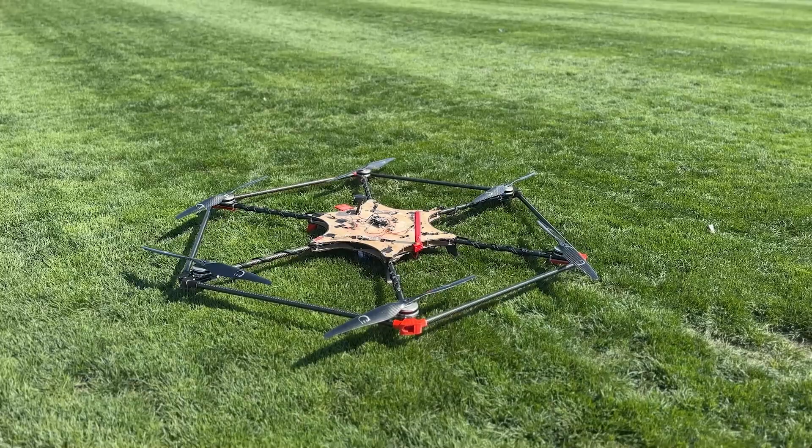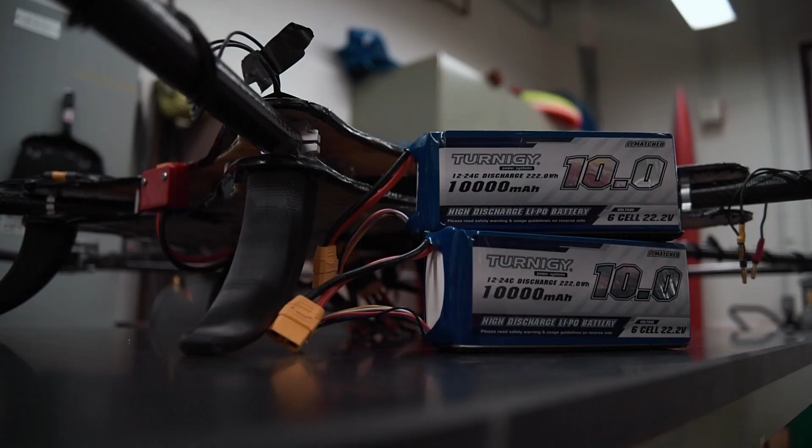This year, our drone, the Airbrutus 1, is a hexacopter 8 feet in diameter, made of 2 composite fuselage plates, carbon fiber tubes, and is supported by a carbon fiber truss system. Our propulsion system uses the Titan Air TA8010 motor coupled with a 30x10 carbon fiber propeller and is powered by 4 10,000 mAh batteries connected in parallel.

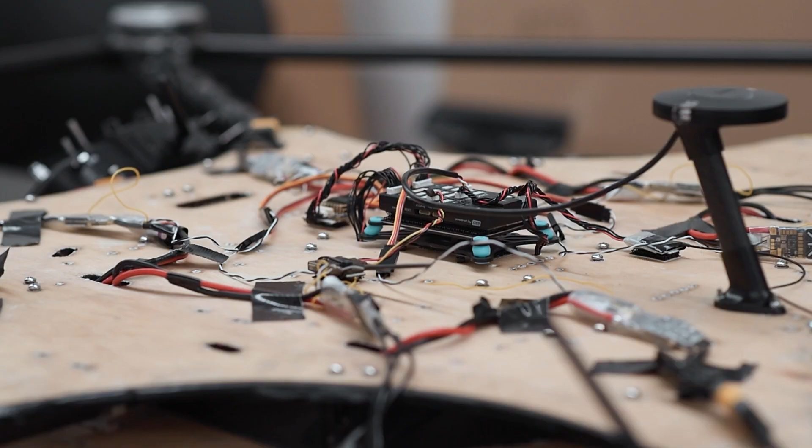The vehicle can hold up to 5 payloads on its bottom fuselage plate, and to drop them utilizes a spring-based parachute deployment system. For the season, the team chose the Pixhawk 4 for the flight controller, running the PX4 software. To receive video feed, Airbrutus 1 has a SIYI ZR10 camera connected to the NVIDIA Jetson Nano to process the live video feed.

The SUAS competition rules and Buckeye Vertical's mission plan lay out several vehicle requirements for Airbrutus 1. Airbrutus 1 must be able to fly for both 12 miles and 15 minutes fully loaded in a single flight, with the additional ability to fly 10 miles in 15 minutes. Airbrutus 1 must then be able to complete the payload mission in 10 minutes to leave a 5-minute safety buffer. To satisfy these requirements, the aircraft's gross weight must be less than 40 pounds.

Additional requirements include a 90% image detection accuracy, 150-foot object detection radius, and 25-foot maximum waypoint error. The airdrop zone is a 15-foot radius circle around the ODLC object. To ensure the airdrop lands within the circle, the team requires Airbrutus 1 to be able to position horizontally within 1 foot of the object. Additionally, the payload must land within 4 feet of the aircraft's position.

To comply with the competition's weight rules and optimize speed and flight time, the team created a 1.5-pound acceptance requirement for each payload. These criteria combine to satisfy the main requirement of aircraft stability. Lastly, the team requires a maximum 10 feet per second impact velocity for the payload, ensuring a gentle landing.

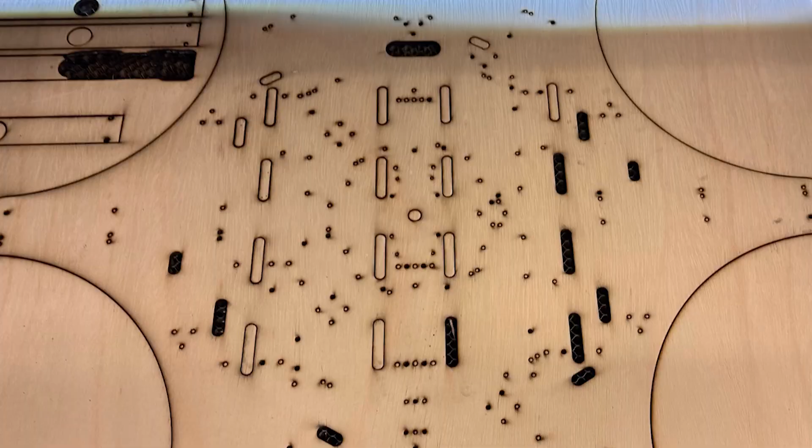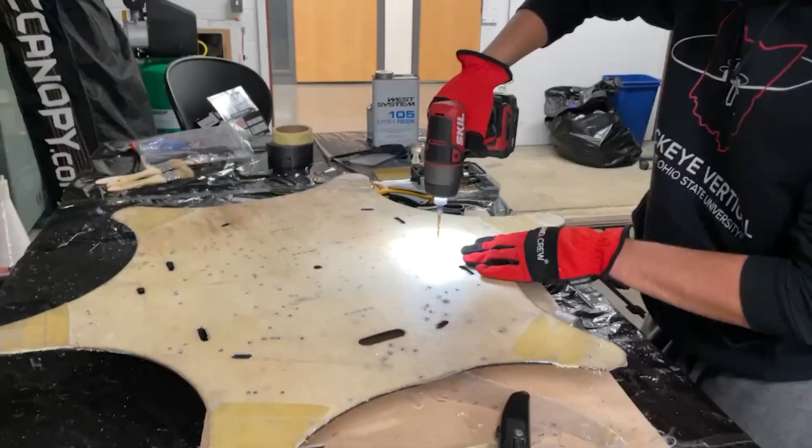The main airframe of Airbrutus 1 is composed of 2 1/4-inch balsa wood fiberglass plates. The balsa wood was laser cut into the desired shape from the CAD, and the fiberglass was added to the balsa wood using a wet layup process. The drone's arms are made of circular 1/16-inch thick, 36-inch long carbon fiber tubes, which were cut using a circular saw. Metal brackets were used to fasten the tubes to the fuselage plates, and between the 2 fuselage plates exists a Delrin hex connection system, which connects all 6 carbon fiber tubes to each other to minimize vibration and provide rigidity to the frame.

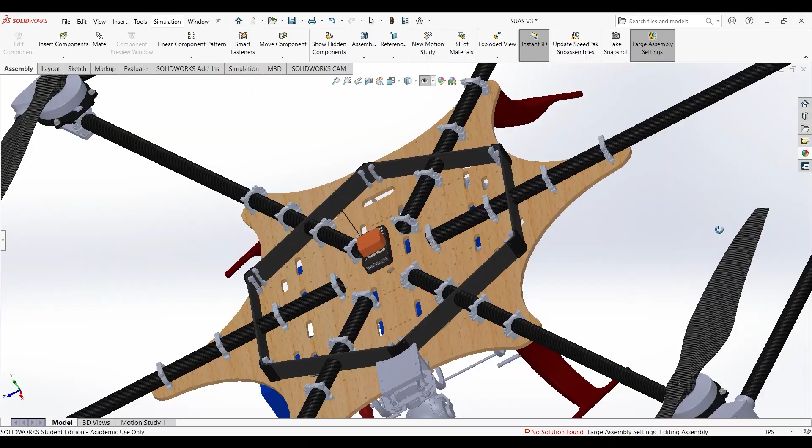Outside the fuselage plates, a carbon fiber truss system is used to connect the ends of the arms of the drone. These tubes are 1/32-inch thick and connected using a 3D printed bracket. The purpose of the truss system is to minimize oscillations at the end of the drone's arms.

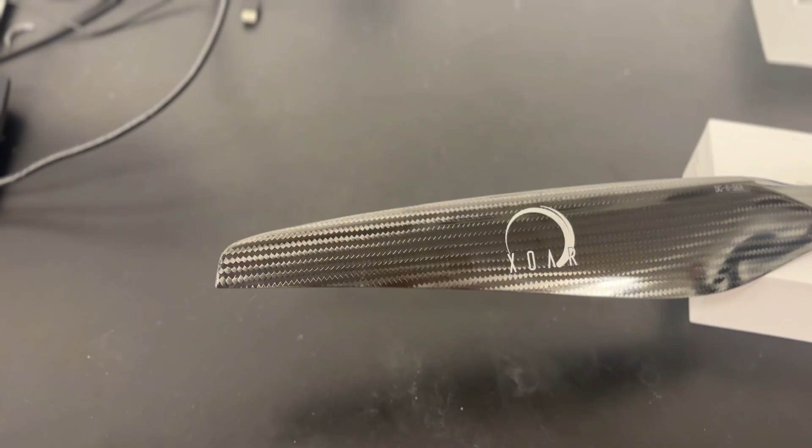The propulsion system of the aircraft consists of 6 Titan Air TA8010 motors alongside 30x10-inch props with an iFlight Blitz 80A ESC. 4 of these motors are canted to 2-degree angles opposite of each other. This canted configuration allows the aircraft to have more yaw authority without affecting the roll and pitch of the aircraft. These motors are mounted to the carbon fiber tubes using vibration dampening mounts. The drone is powered by 4 6-cell 10,000 mAh batteries connected in parallel for a total of 40,000 mAh.

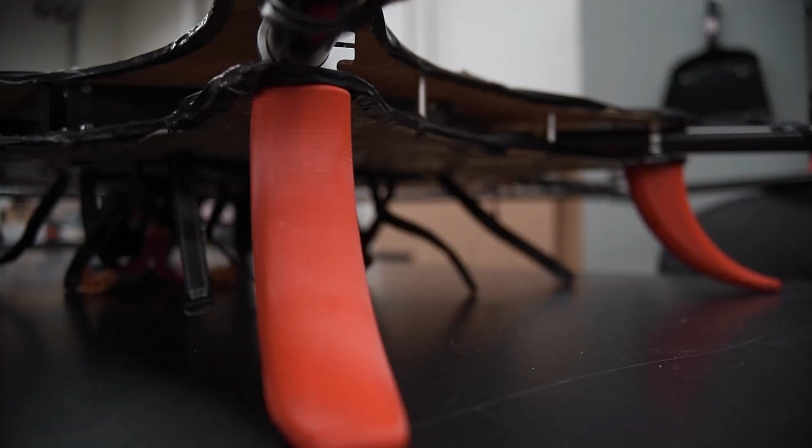4 landing gears were 3D printed and mounted to the fuselage plates, sharing a bracket with the carbon fiber tubes to reduce weight. The RTK was mounted on the top plate to ensure signal was received, and the Jetson and Pixhawk were mounted near this RTK to ensure they could communicate with each other. The batteries were mounted on the bottom plate to ensure a low center of mass for stability during flight.

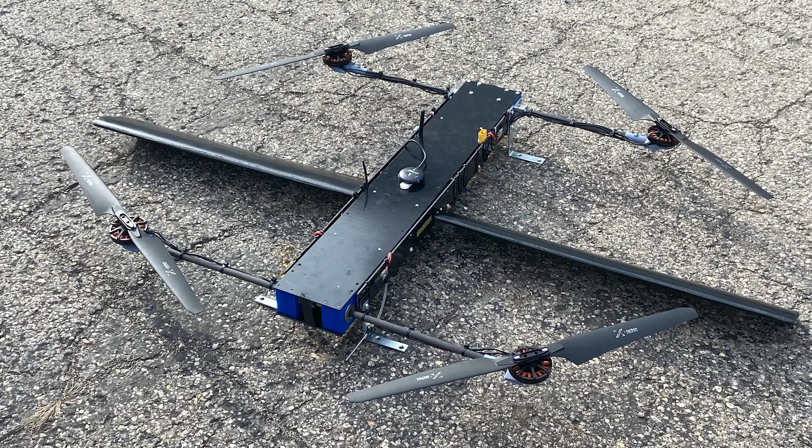One of the alternatives considered for the drone was a VTOL fixed-wing design where 2 of the rotors would rotate 90 degrees. The design was abandoned due to complexity of the flight and the weight of the aircraft. Additionally, Garolite G10 plates were considered for the airframe, however they were not sturdy enough and were prone to vibrations.

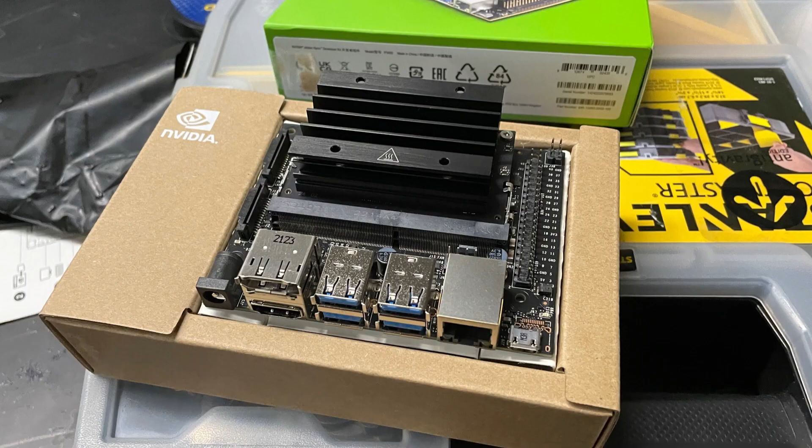Our UAS uses a SIYI ZR10 camera connected to an NVIDIA Jetson for processing the video feed. The video is processed by the NVIDIA Jetson using YOLOv5 on its onboard GPU to identify the shapes, colors, numbers, and mannequins. After the location is obtained from the detection model, this data is then processed and transmitted to the Pixhawk to perform a specified translation in its environment to drop the payload.

We considered other cameras such as the Canon M50, but the SIYI ZR10 camera was the best choice due to its high-quality 10x optical zoom as well as its built-in gimbal. Furthermore, the camera of choice is compact and lightweight, which is perfect for the specified objective.

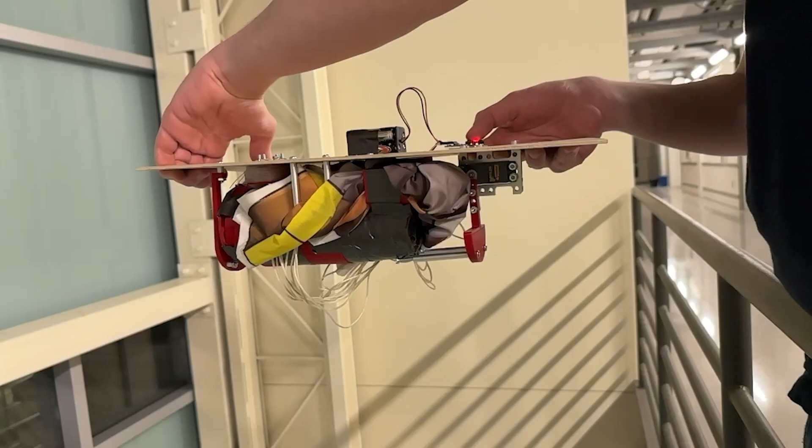The payload system operates by servo-activating the freefall of a water bottle capsule, which is slowed close to the ground through a drone-attached parachute. The system consists of 3 major components: capsule, release, and deployment. The capsule secures an individual bottle and enables easy setup for varying shapes and sizes. It also contains a parachute holder, and one end of the deployment line. Using PLA and carbon fiber materials ensures the weight requirement is met.

For the release mechanism, 2 PLA supports hold the capsule against the fuselage bottom. A servo rotates one support, which releases the capsule.

The deployment mechanism is responsible for opening the parachute 20 feet above ground, which optimizes drop time by using free fall for 75% of the sequence.

The 60-foot deployment line connects the parachute to a tension lever on the fuselage bottom. The lever causes parachute deployment, then immediately drops the line from the aircraft. This system satisfies time, weight, accuracy, and safety requirements.

2 system alternatives were considered: standard parachute descent system and winch descent system. Testing of the first alternative, which used immediate parachute deployment, resulted in only 10% accuracy. Despite being the lightest system, it was rejected in favor of highly accurate systems.

Winch descent was not tested, but instead estimated to be considerably heavier and slower than the selected system. Because of their comparable accuracies, it was rejected.

With the multicopter being inherently unstable, we will use a PX-4 in conjunction with a Pixhawk to address flight stability. Alternatives such as ArduPilot were discussed, however simplicity and compatibility with the onboard Jetson favored the PX-4.

On the ground, QGroundControl is used with the 915 MHz telemetry module to transmit vital parameters of the drone. Q ground control is used to plan missions according to the competition rule, and different mission parameters are set for optimal path and speed for endurance and completion time.

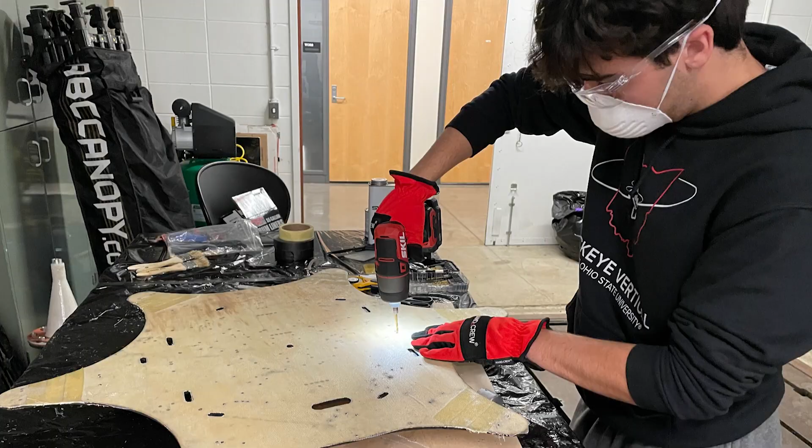Another example is while drilling holes on the fuselage, members would ensure gloves, safety glasses, and masks were worn. For flight testing, safety was always a priority.

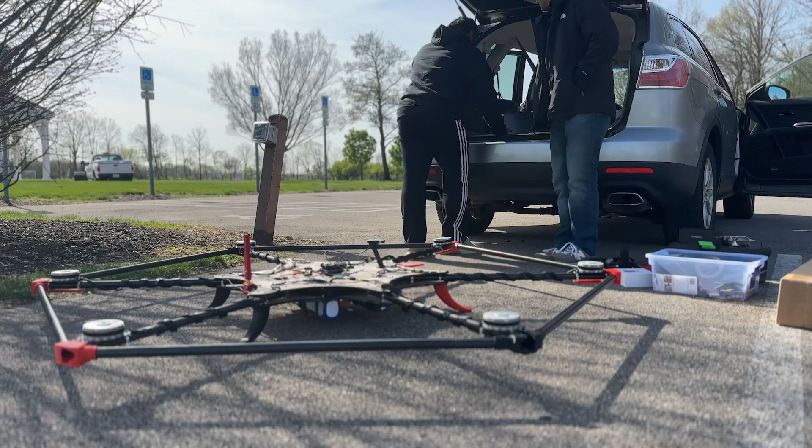For the transportation of the UAV, batteries were always stored inside a bat safe, accounting for the worst possible scenario. Once at the destination, the drone was not powered onto the shunt plug until the drone was checked for faults and was fully built except for the propellers.

The drone's motors were then individually tested before removing the shunt plug and installing the propellers. Once the drone was ready to fly, there was a dedicated team member to make sure the drone was not armed so that other team members could move the drone at least 50 feet away from the team.

After a flight was completed, a member was assigned to immediately remove the shunt plug from the drone while standing outside the prop arc. In order to maintain the safety of our drone, we follow a strict 3-stage process before deploying our software. This is a demonstration of our first stage, simulation.

Here, we are using JMavSim to test our use of Mavlink commands to autonomously control the drone off board. In this demo, the drone takes off and then travels to 2 different XY positions.

With the use of this go-to-point logic, we are able to dynamically adjust our pathing based on our input from our payload target localization algorithm. The Mavlink commands are the communication sent between the NVIDIA Jetson running the algorithm and the Pixhawk interfacing with the drone hardware.

One of the most essential processes to get the drone flying properly is the tuning process. A major component of this process is tuning the PID controller. Buckeye Vertical aimed to use the inbuilt PX4 auto-tune command to do so.

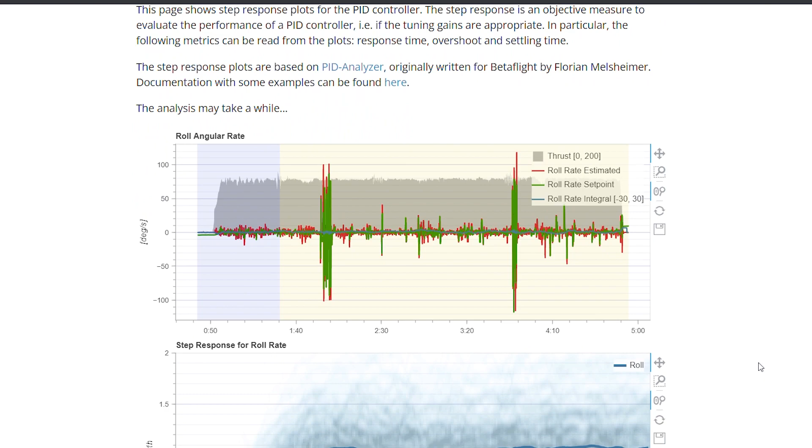To get Airbrutus 1 to be stable enough to successfully execute this command, the team utilized the PX4 flight review website and performed analysis on the PID plots that were generated. The team used the Ziegler-Nichols method to tune the PID parameters based on the PID plots.

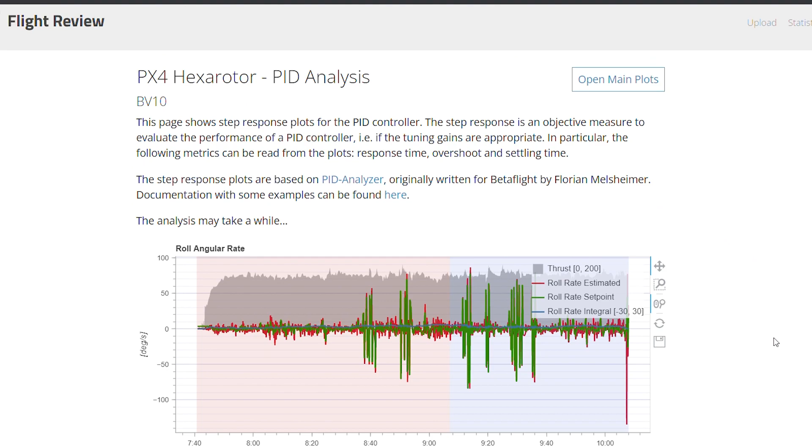However, despite the team's valiant efforts, the drone was unable to be tuned in the yaw axis due to weather restrictions, time constraints, and inexperience. This was unfortunately the biggest obstacle in the team competing in person this season.

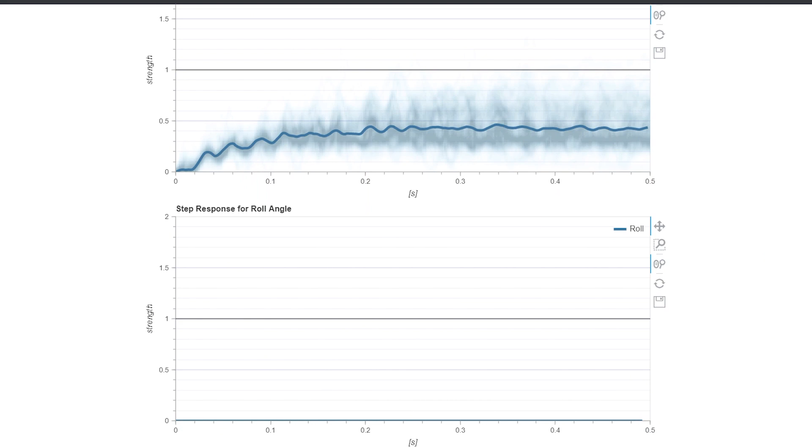Although the final result may not be what the team desired, the team truly learned a great deal from this very valuable experience.

We decided that the most efficient method of training a model for the large number of possible payload target combinations was to create a large data set using domain randomization. With domain randomization, we're able to simulate every single possibility in the target, as well as every single possibility in the environment around the target.

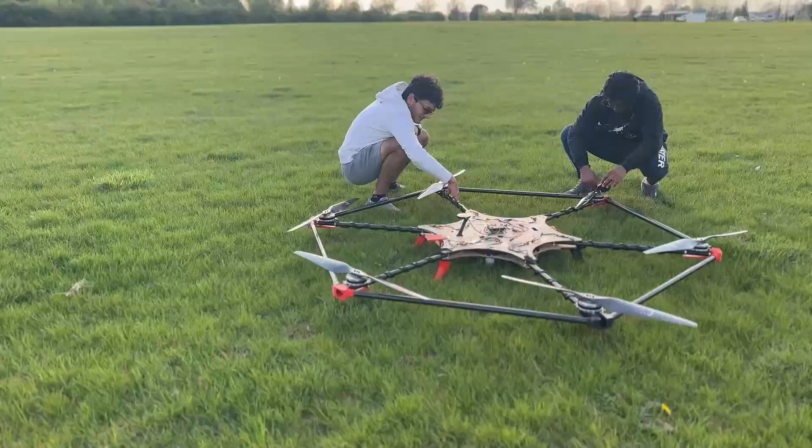With such a diverse data set, we're able to train the model to adapt to the real-world situations that it might encounter. When we tested this model on real-world data, we consistently reached above 90% confidence rates. Buckeye Vertical had a great season.

But unfortunately, due to time constraints and unforeseen circumstances, we're unable to meet all the flight readiness requirements. With that being said, Buckeye Vertical has gained a tremendous amount of knowledge with all the hard work that was put in this season. The team plans on completing the drone regardless of not competing and looks forward to sharing a video at that time.

Buckeye Vertical thanks you for this opportunity and looks forward to competing in person next season.